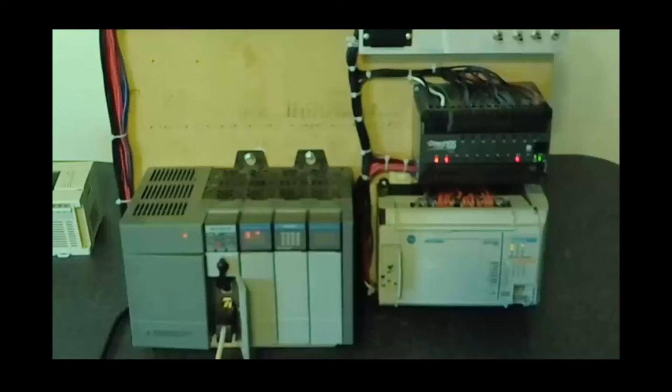What I have here are several different PLCs that are mounted to a trainer board. You got different models, different types, different manufacturers. This one right here in the front, the rack system, is an Allen Bradley rack system, an SLC 500. You have a power supply right here, which is a P2 power supply. There's a CPU in the first slot. Then we have an input card and two output cards.

Notice the lights. These lights tell me which inputs are currently closed, and the outputs, when we use it, will tell us which outputs would be currently on. Now, the rack systems are typically used for larger areas, multiple equipment, larger systems. So I can hook up multiple equipment and run multiple equipment through one PLC.

Now, these little brick processors, DirectLogic 105, Allen Bradley, Micrologix 1500, these are basically small bricks. What they're going to run is typically individual equipment and small processes where you don't have the need for multiple or lots of inputs and outputs. Now, one of the similarities these PLCs have is right down here in this little key switch that I'm pointing at here. This key switch can operate in 3 modes, and it controls the mode of the processor.

If I put the switch in one mode, this becomes program, and all the PLC will do is program. If I put the switch in the other side, all it'll do is run. So you can't tweak it, you can't do anything with it other than run. Now, most of the PLCs are going to be in the position called REM. This stands for remote. It's remote program, remote run. Now the mode of operation is based on the software inside of the CPU. That's the most common position these are going to be in, because I can program and run right here.

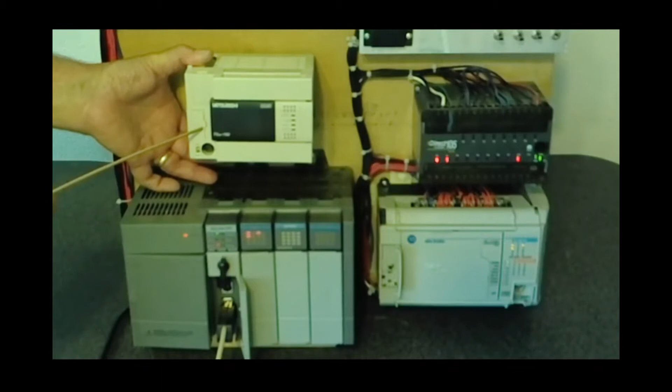So PLCs, now we got different types, we got different manufacturers, we got a little bit of similarities in here. We can actually even add to that this guy, a Mitsubishi. Again, this one is only going to have one mode, and it's going to be in REM. But this is a little bit different PLC, even though it's a different color, shape, and size. These 3 are workhorses in the industry. This one gets into higher speed processing. But not every application requires high-speed processing. We're going to get into that in later videos.

Now, one of the biggest differences in the PLCs isn't just the shape, the size, and the color. Internally the PLC has to be programmed. And this is where the biggest difference is. Every manufacturer has to have their own software. It's all proprietary. So for every individual make and model PLC, you typically need different software. That's where the problems start to exist. We are going to look at the different types of software that are used for the different PLCs, and the similarities.

Now, first of all, every one of these is going to have some type of file system which is going to be different for every make and manufacturer. Every one of these is going to have toolbars. Standard Windows toolbar on the top, function toolbars below it. The function toolbars are going to be different with every software. But one of the similarities they have is they're all going to have the same exact type of programming. Right here, what I have here is relay ladder logic. One side right here is a power rail or a logic rail, and the other side is the return.

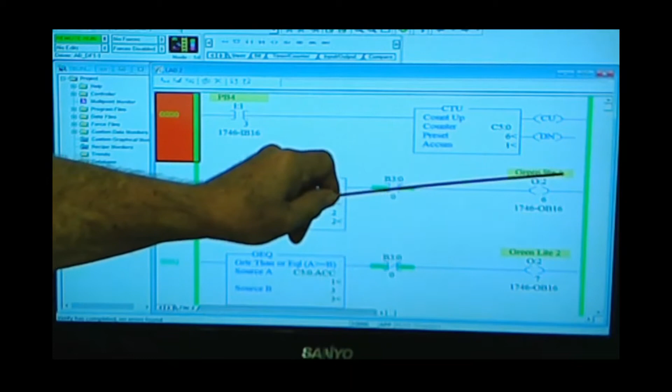So in other words, I'm going to actually turn on different outputs. These numbers right here are numbered for my input card, slot number 1, screw terminal number 3. So there's always going to be a numbering system as to where the input terminal is. What's connected to that input terminal could be virtually anything. Push buttons, selector switches, proxies, you name it. Now over here is going to be my outputs. I have output card, slot number 2, screw terminal number 6. Right here I have identified what the output actually is. Right here I have identified what the input actually is.

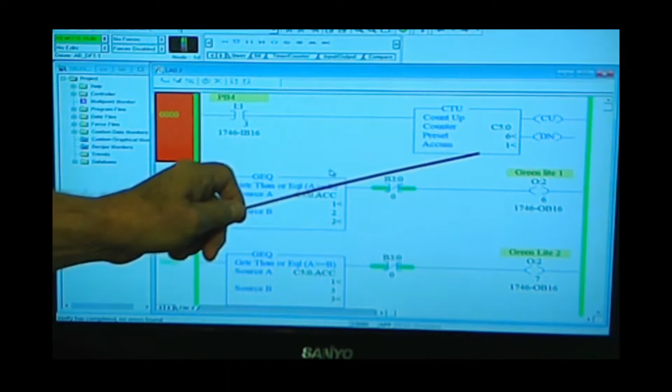This simple software right there is going to operate what's called a counter. It's going to be a count up counter. Now I have this counter preset to count the number 6. The accumulator right now is currently sitting at the number 1. And what I have here is my push button number 4. So if I come over here and push my push button number 4, when that push button closes, this counter's accumulator goes up by 1, turning on the output.

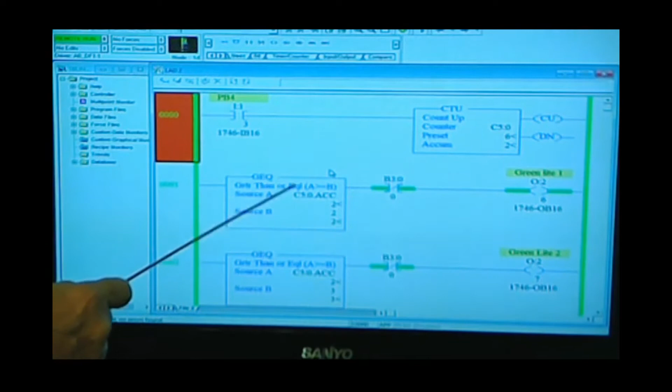This little device here is going to open the contact right there and shut the output off. But now this statement right here is a comparison. Greater than or equal to. I'm going to compare the accumulator of this counter. So this accumulator is right here. I'm comparing it against the number 2. When that accumulator is greater than or equal to the number 2, the output turns on.

Now if I go down 1, here we got another comparison, greater than or equal to. We're going to compare the counter's accumulator against the number 3. When this accumulator, which is currently at the number 2, reaches the number 3, the output turns on. And all I have to do for that is push the button. The output turns on. Now let me scroll down here a little bit. We even got more.

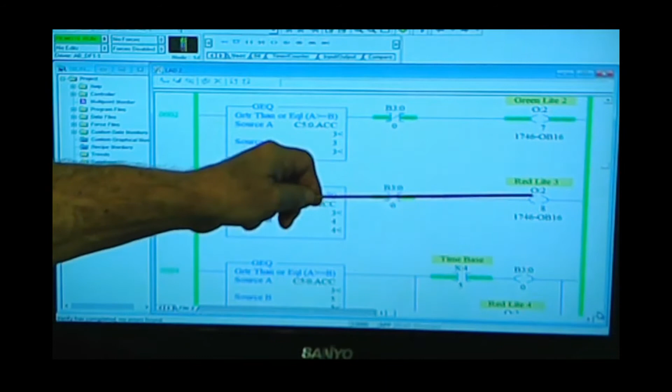We have another greater than or equal to statement. Source A is the counter's accumulator, which is currently the number 3. This compares against the number 4. So when that accumulator reaches the number 4, becomes greater than or equal, this output turns on. And again, all I have to do is push the button to do that. The output turns on.

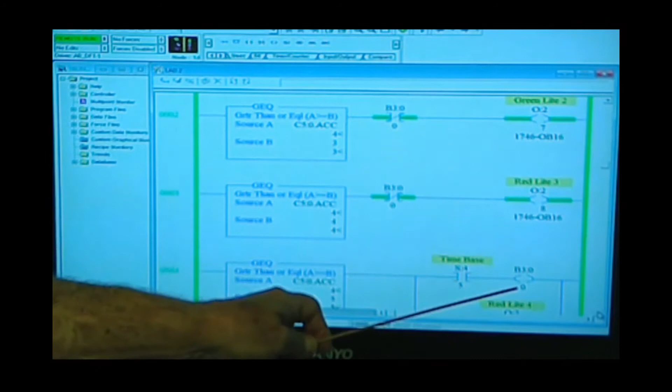Now down here we have another one, greater than or equal to. This is going to be source A is the counter's accumulator. It is currently the number 4. When it reaches the number 5, this output turns on, which is a binary. It's a virtual relay. So this binary turns on. The address right here is the same address as all these others. So when that happens right there, this turns on, these contacts open.

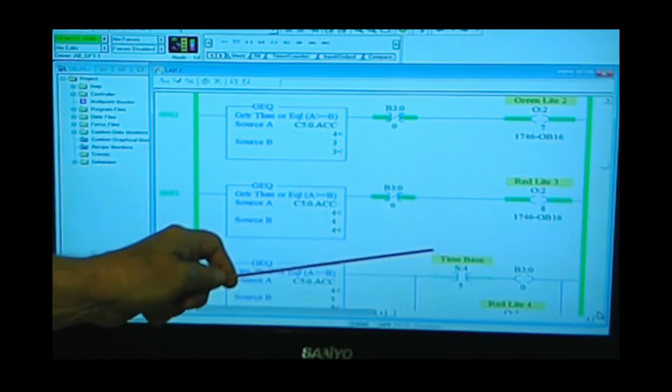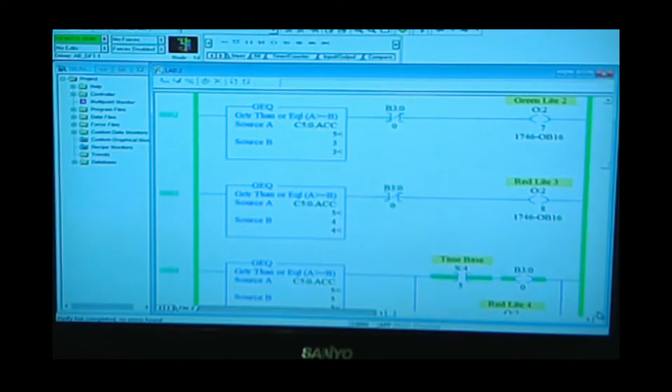But now this time-based contact right there is part of a status file. This status file is operating addressed to the CPU time clock. So now this is set to operate about every half second. So this is going to cause the lights to blink. And all I have to do again is push the button once. And everything blinks. So ladder logic, it's not exactly difficult. This is more of a complex program to work with. It's only going to be several lines, but everything operates several lines.

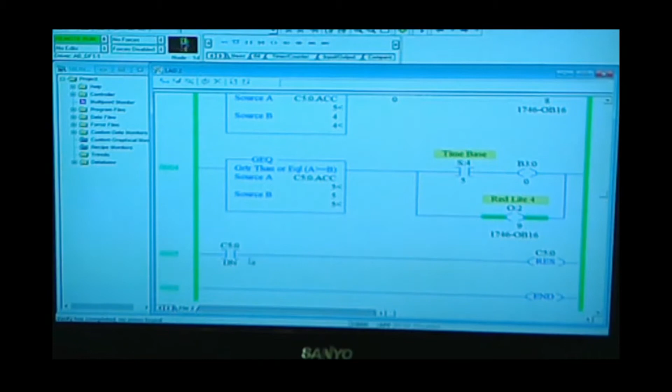Now the last line right here is going to be what's called a reset. Okay, now when this counter right there, C5:0, reaches its limit of 6, it's going to reset the counter back to 0. So now we go ahead back up here, there's the preset 6, the accumulator's 5. I push the button again, it goes to 6. But now there's a problem.

When I push this button, it goes to 1. And it goes to 1 because I'm not fast enough with my finger. So it counts the number of scans. In the time it actually pushed the button, that CPU scanned 300-400 times. So it actually counted up to the next number.

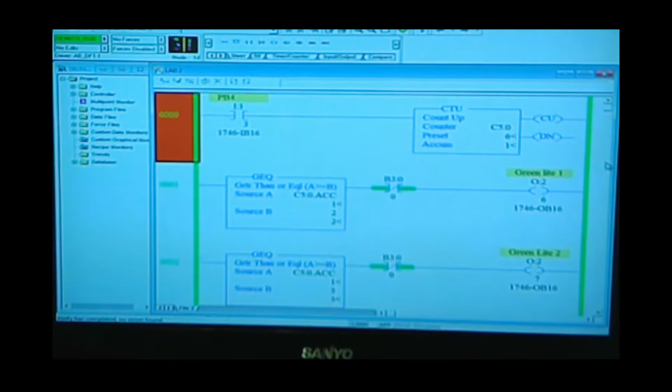Now this one is a simple Allen Bradley programming. It's not exactly complicated. It's probably some of the easiest to use. But now let's progress on to some of the other types of PLCs and programming for them. This is just the introduction, guys. We're going to get deep into this.

What I have here is another software from Automation Direct that runs the Direct Logic types of PLCs. Well, here we have a file structure on one side. We have the standard Windows toolbars on the top, and now we got all the application or the actual toolbars for operating here, but now they look a little bit different. All my programming and commands are off to the other side. So in other words, all the file structures again are different because this is a different software. But the programming portion is almost identical to the others.

Simple ladder logic. So what I have here is a simple 6 rungs of the ladder, 7 with the end statement. Right here, this stop button is referring to an X. So X10. So this is my screw terminal, X10 on the PLC. That's a stop button. My run button is going to be connected to terminal X number 2. I have a reset button, and I have a timer accumulator. This is a counter. Counter 0, it's going to count to 5.

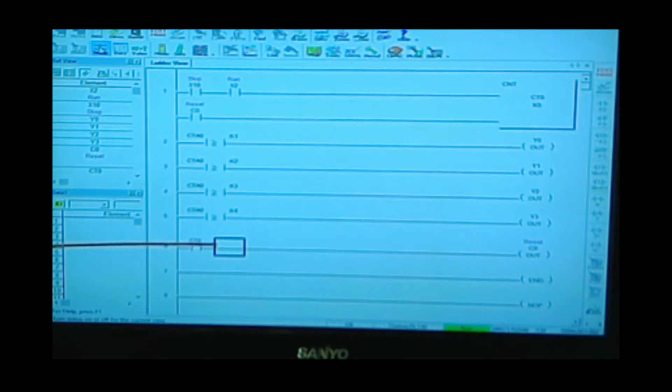Now, how do we know whether or not the program's working? Just like every program, when we run the program, it's going to show the status of the program as highlighted. So every one of these become highlighted. When this contact is highlighted, it's activated. When this contact is not highlighted, it is deactivated.

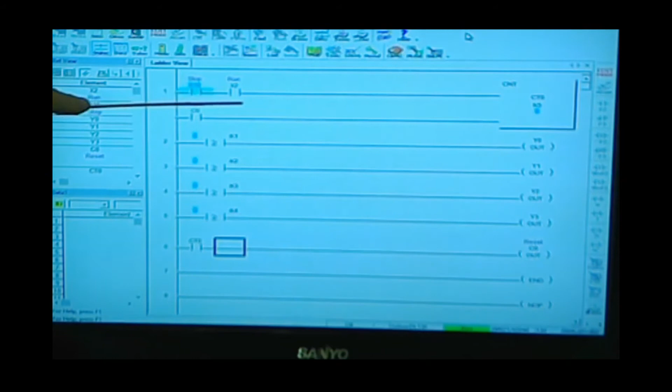Later on, we get into this terminology, and this would be a 1, and this would be a 0. So we're going to talk in terms of binary language, which is much easier to describe every one of these. I'll get more into that quite in depth. Now, it's very simple. I come over here, I'm looking at button X2, so I push my button X2. Right there it highlights. I got a little bit of a lag.

I let go of the button, and my output turns on. On my trainer board, my light's on. I push the button again. Well, we went up to the number 2 on the counter. The output turns on. I push the button again, and the counter goes to the number 3, and the output turns on. We have 4. The output turns on. Okay, we push the button again, it resets.

PLCs don't have to be that complicated when we work with these things. The programming makes it very easy to actually troubleshoot the PLC. These are the inputs. Okay, the input is going to turn on the outputs. If this output doesn't go on, whatever's in front of it is where the problem is. So it makes it very simple to troubleshoot mechanical equipment, large systems and so forth by using PLCs.

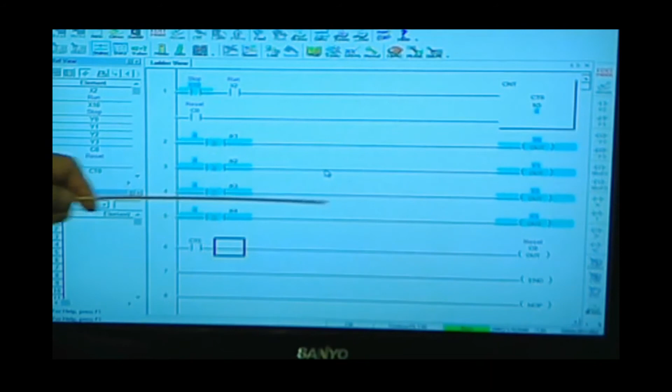By using the highlighted numbers and contacts, this tells me which types of inputs are going to be activated and which outputs should be activated. If one of these outputs do not activate, the problem is right on this line directly in front of it. So using a PLC makes things a heck of a lot easier to troubleshoot equipment, large equipment, complex systems, and even simple systems. But you need to have access to the programming to see what the heck's going on. So it's simplified in troubleshooting. Every PLC does that. Now let's look at another type of PLC program.

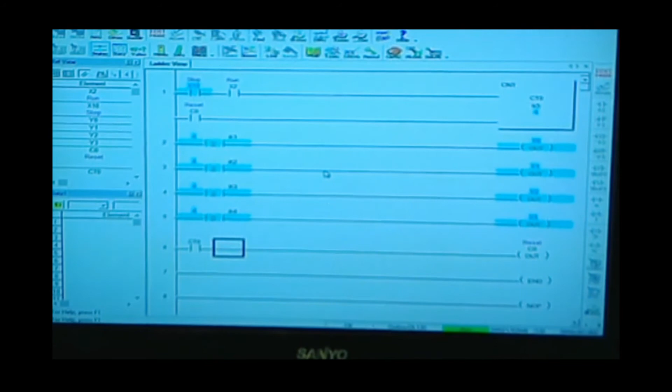Again, we have another software. This is what's called MELSOFT GX Developer. This is the Mitsubishi type software. Over here on the left, we have a file system. Again, a little bit different than the others. We have the standard Windows toolbar on the top. And now we have all the different types of commands in a different format. The only thing that's actually going to be common with all the different softwares, no matter which brand or make it is, is going to be right down here. This is going to be the ladder logic. The programming logic is going to be the same in just about every one of these.

There's a lot to the programming. Now I don't have this one hooked up as of yet. We're going to go through this later in an individual demo. But right over here we have the same concept. X2 is a stop push button. Normally closed button in the field activates the open contact. X1 is my start button. I push the start button once, it activates a counter. This counter is going to count up to the number 6.

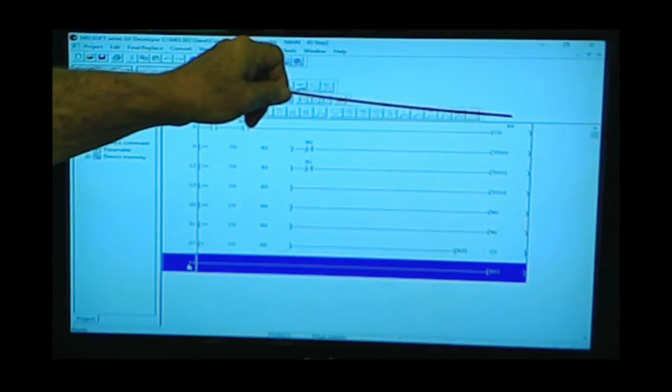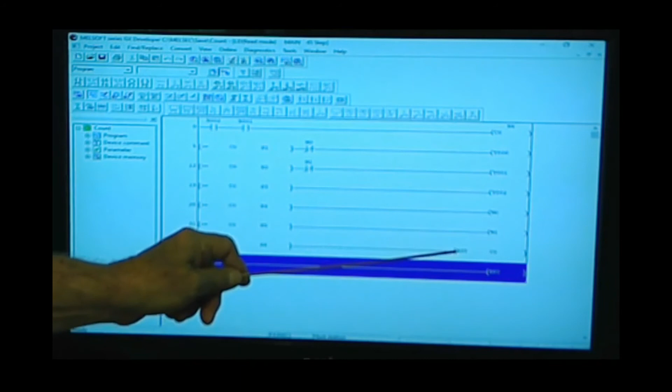Now our commands are a little bit different. Here I have a bracket, and this says greater than or equal, counter 0, greater than or equal to the number 1. Okay, once that counter reaches the number 1, the output turns on. Greater than or equal to number 2, the output turns on. Greater than or equal to number 3, 4, 5. But now down here, when the counter reaches the number 6, it resets the counter. Down here on this one, when it becomes greater than or equal to number 5, it activates a binary, which opens these two lights, shuts these two outputs off.

Okay, so the programming is going to be very similar in every one of the PLCs. It doesn't matter whose make, whose model it is. It's all going to be very similar programming regardless who did it.

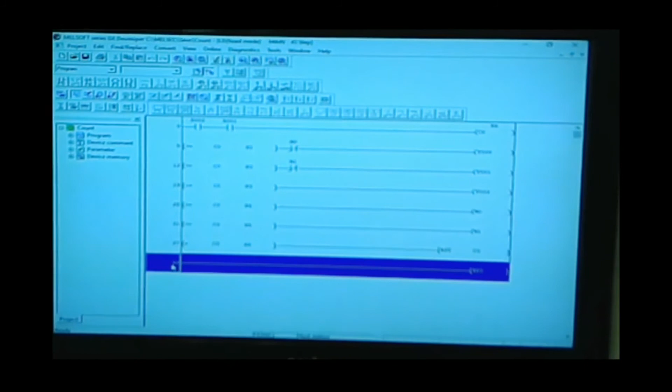As we start working through some of these PLCs, down here on this Allen Bradley, I have my inputs, I have my outputs, and right up here I have a set of lights. When I push the button right there, notice the input light changed momentarily, the output light turned on, indicator light turned on up here. I push the button again, the next light goes on, output goes on. Push the button again, my input turns on momentarily, the output turns on down here. Push the button again, we got another output on, and now the other output's blank. Now, that was a program we just looked at for the Allen Bradley.

Now, right here, these LEDs indicate the condition of these outputs. So this LED tells me when the output is on, when the output is off. These are the inputs. These inputs are closed contacts on my board. And they tell me when the input is closed and when the input is open. So by using the LEDs on the lights, this tells us the condition of whatever equipment we're working with. Now I go ahead and push that button again, it shuts everything off.

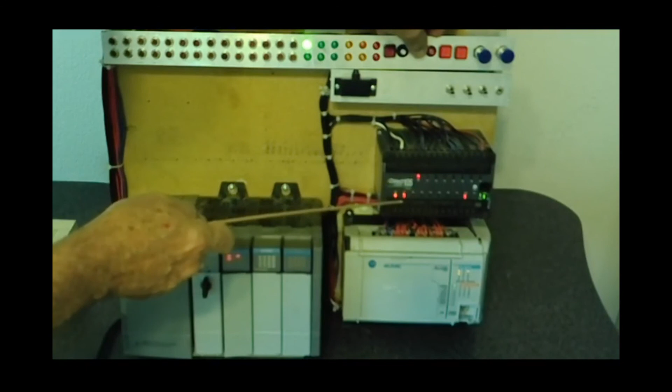Now we come over here to this button. I do the Direct Logic. I push the button once, the output turns on. Lights up right here on the terminal, Y0. Push the button again, the output turns on. Lights up Y1. Y2 lights up, output turns on. Y3 lights up. Push the button again, it goes off.

So in other words, we use the actual lights to troubleshoot the equipment. It identifies what's working, what's not working. We can use the programming to actually troubleshoot exactly what's not working that causes the outputs to not work. So PLCs don't have to be complex. They can actually work out to be very simple.